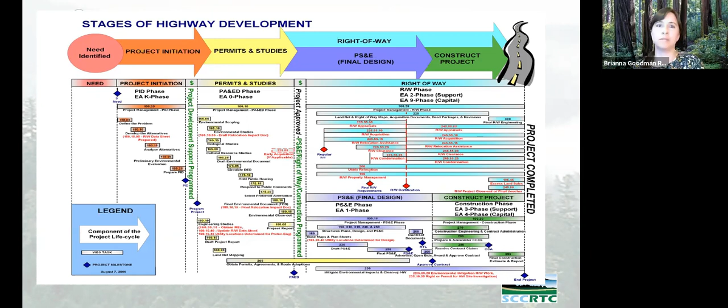All right, thanks, Brianna, appreciate that.

So tonight again, our two projects we're going to talk about, they are distinct, but they are closely related. And you're likely going to recognize some of the images from the SLV planning study, because that was the source document where many of the elements being considered in our project have come from. So this is your plan. These were your goals, your opportunities brought forward, and your community values. That's what we use as a foundational document.

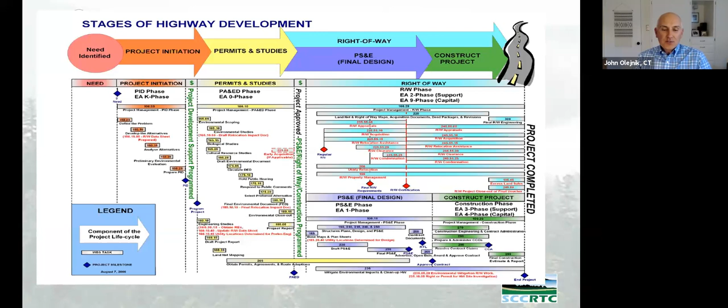So first, let's give our attention to Justin McMullin, who will briefly present to you what we call the Felton CAP-M. As you listen to the presentation, maybe look for the complete street elements that are being included in this very important pavement project.

Thank you, John. Good evening, everyone. My name is Justin McMullin, and I'm the project engineer for the Felton CAP-M project.

The Felton CAP-M is a preventative maintenance project which intends to extend the service life of the existing pavement with minor distress for a minimum of 5 years. The additional assets part of this project include Americans with Disabilities Act compliant curb ramps, culverts, and guardrail replacement. The project would bring the facilities up to good condition and meet current crash standards.

Within the project limits, the San Lorenzo Valley Plan was used to identify complete street opportunities within the town of Felton. Our project limits on SR9 start at Highway 1 and end 150 feet south of El Solyo Heights Drive, post mile 0.046 to post mile 7.5.

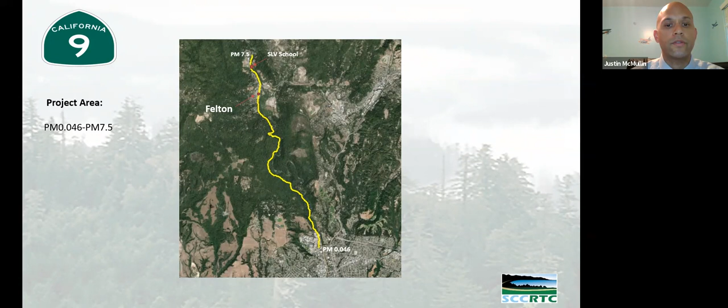The complete street elements to be addressed would begin at Laurel Drive to Kirby with new sidewalk. When taking a look at our layout, you may see resemblance to the SLV plans. We show sidewalks and bike lanes on both sides of Highway 9. In addition, we have restriped a 12-foot two-way left turn lane.

The plan also depicts a proposed crosswalk pending analysis in red, which is not part of the scope and will need to be analyzed in the next phase of the project.

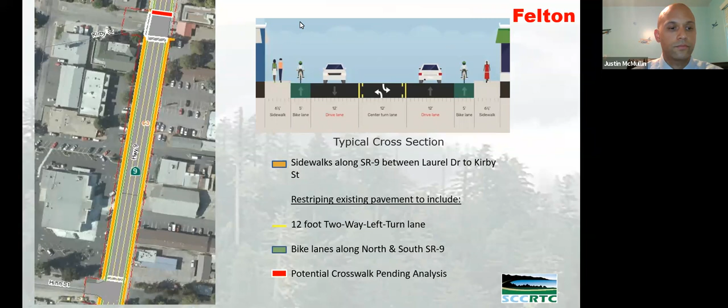At Graham Hill Road and Highway 9, we have included a right turn channelization. Currently, the right turn lane is free right. By not allowing it to be a free right, we create better pedestrian access. Realigning the right turn lane will allow storage for right turns while also allowing guidance for bicyclists with the separation of the through movements. Additional improvements include reconstructed sidewalk, island, ADA curb ramps, and enhanced crosswalks.

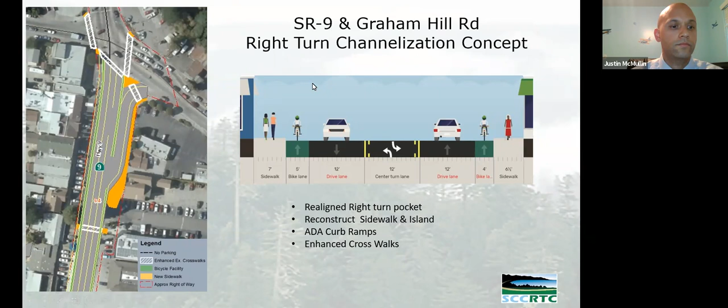With the help from SCC-RTC, we have identified areas within Felton that could benefit from improved sidewalk, crosswalks, and right turn channelization. We have utilized some of the typical cross sections provided in the San Lorenzo Valley Complete Streets Corridor Study and have modified them accordingly.

With the SLV plan in mind, we analyzed their feasibility. The pedestrian concepts were mapped using GIS to get an idea of existing utilities, right-of-way, environmental, and physical restrictions that might occur. We provide environmental mapping to have the area studied for project approval and environmental documents.

By obtaining environmental clearance, the project has the ability to incorporate additional funding from other sources for future construction of complete street elements, giving our local partners opportunities to apply for special funding.

Additional areas scoped for environmental clearance include multi-use path south of Laurel to Redwood, sidewalk at the entrance of Henry Cowell State Park, and a continuation of the multi-use path from Redwood to Lakeview Drive with the addition of viaducts to widen the roadway.

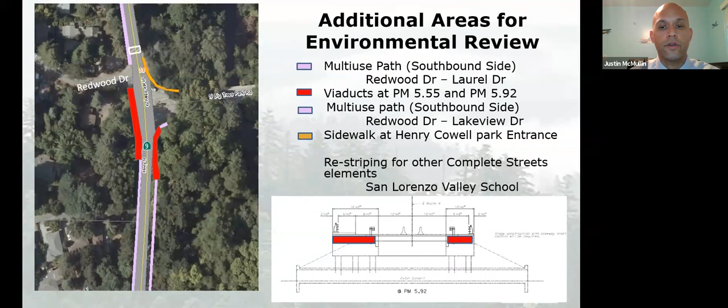Any restriping for complete streets elements at the school access will be reviewed during the next phase of the project. The impacts of the project's assets required a higher level of environmental document, streamlining the environmental clearance of the complete streets elements identified in the SLV plan.

A brief overview of what we discussed tonight.

Redesign right turn channelization at Highway 9 and Graham Hill. Placing sidewalk along SR9 from Laurel to Kirby.

Drafting the environmental clearance areas and studies for future potential projects. These studies would include the multi-use path, viaducts, sidewalk at Henry Cowell entrance, and restriping in front of the school.

The project is set to complete PA&ED in 2025, with construction in the summer of 2027.

And with that, I'll let Joseph finish with the complete streets PID locations.

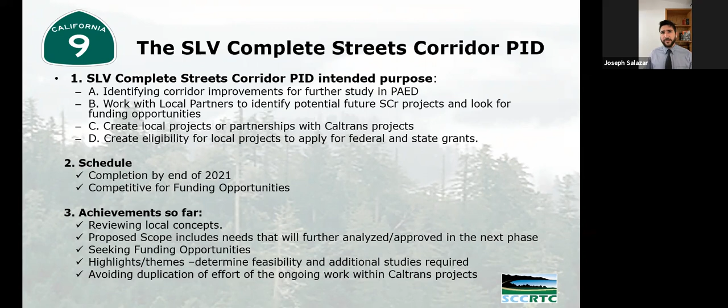The locations we'll cover in this presentation are from Glen Arbor to Felton, Ben Lomond, Irwin Way, and North and South Boulder Creek. This project continues from the Felton Cap M that Justin had just covered, and it has a minor overlap at the school as covered in Justin's slides.

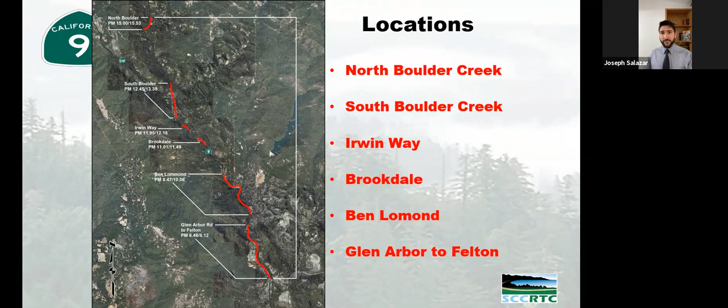Heading north from the school, we've scoped out bike lanes on both the north and southbound sides of the road where feasible, and a sidewalk on the southbound side to be reviewed in the future for feasibility.

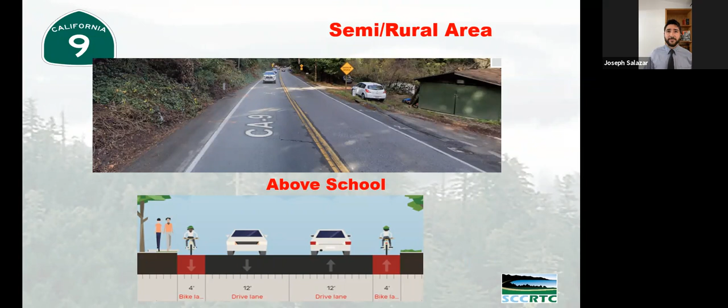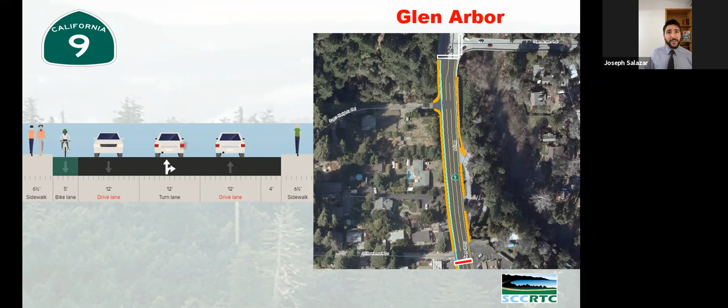These will provide connectivity up to Glen Arbor, where the southbound bike lane continues, and we have also mapped out sidewalk on both sides of the road as shown here, along with crossing improvements down at Willow Brook.

Up north from there, at Highlands Park, we have designed bus stops for both the north and southbound bus routes, as well as a multi-use trail along the southbound side that continues as site conditions allow northwards, as shown in this slide.

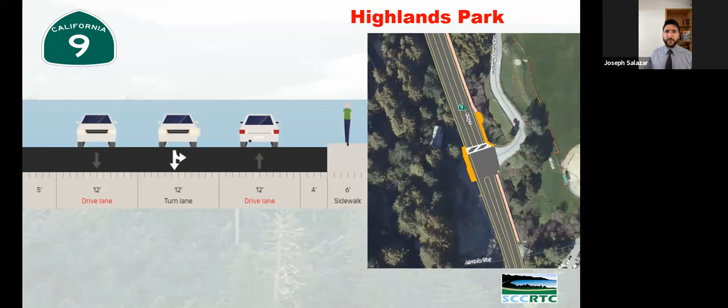This allows for connectivity up to Ben Lomond, where as the roadway widens out, we've mapped out bike facilities, improved parking at storefronts, and updated sidewalks.

A key update, as you will note on this map, is over at Love Creek Road, where we've made a clear delineation for vehicle access to Highway 9, as well as including sidewalk or crosswalks for the San Lorenzo community.

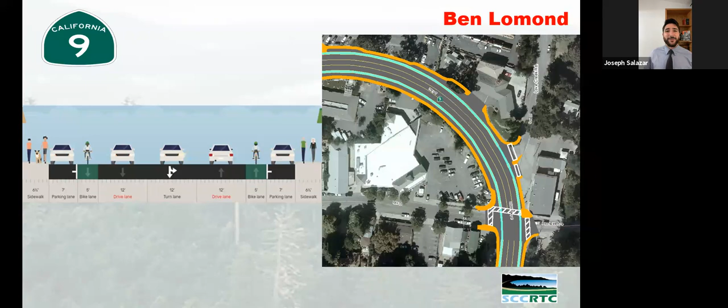Moving northwards up from there, past Mill Street, you'll see the sidewalk continuing up, going through a section of frequently impacted vegetation, which has been scoped for removal.

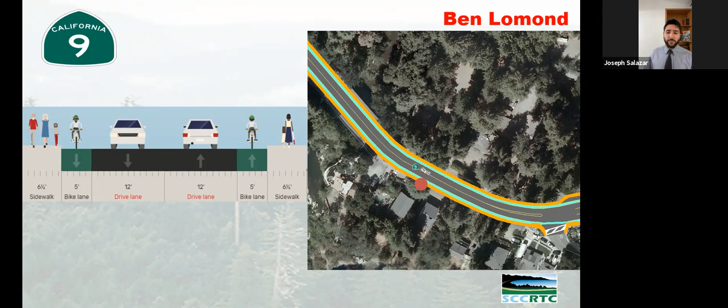Further north, as we go near Alba Street, we have laid out delineations for better ease of driver access, as well as adding a north and southbound bike lane, while maintaining the northbound side sidewalk as shown in orange.

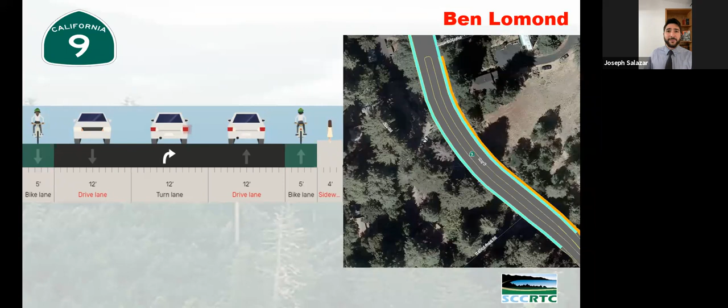In Brookdale, due to site conditions and roadway width limitations, Brianna has been great in coordinating with the owner of the Brookdale Lodge on the possibility of including sidewalk within his parking lot area to be reviewed in the future. This would allow for safe pedestrian access northwards and would also limit the need for tree removal.

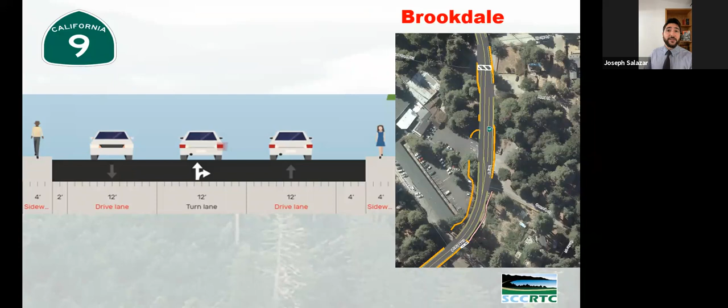Similarly, on the southbound side, we've included a multi-use path segment just opposite from the inn, which would also minimize vegetation impact. And this brings us to the rural section, which is south of South Boulder Creek.

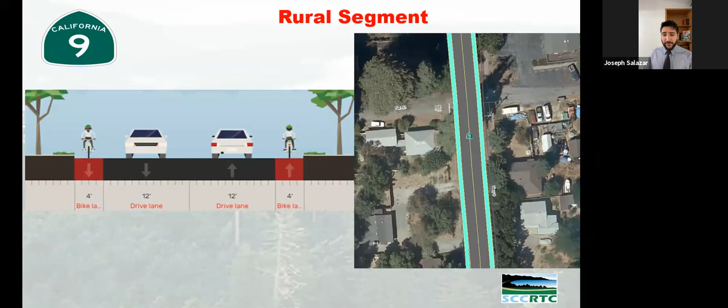We have added in north and southbound bike access, which continues into South Boulder proper, where as the roadway widens out, we've added, similar to Ben Lomond, updated parking and sidewalks, as well as curb ramp extensions to facilitate pedestrian crossings at intersections.

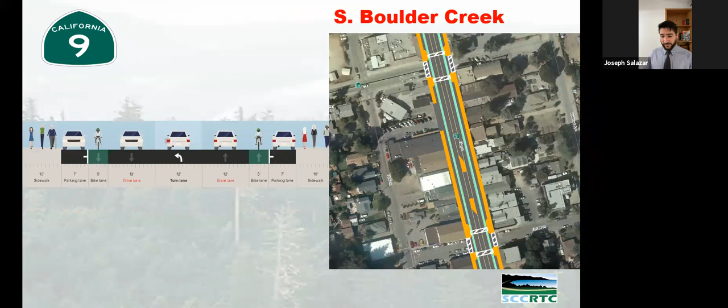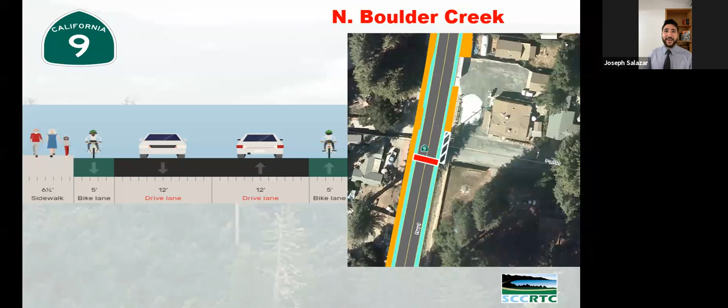Finally, at the far north end of Boulder Creek, near the Mountain Store, we have added bike lanes on the north and southbound side, as well as crossing improvements on the northbound side. Our goals moving forward from here are to deliver the project initiation document by 2021.

From there, SCC RTC would branch off projects from this document and pursue funding. Back to you, John.

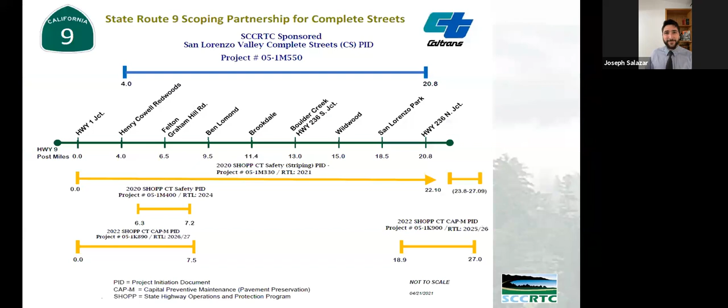We're bringing this slide up now to show you. It's probably something you recall. We've shown it at several of our public meetings, and we've shown it at several of our RTC board meetings as well. What this really demonstrates is a picture of the partnership that we have, and it's an example of the many different projects that are going concurrently right now along Highway 9, along the San Lorenzo Valley corridor.

The blue line up top there, the Complete Streets PID, the one that Joseph just talked about, this is a game changer. This is really the first of its kind because it's allowed us to take the recommendations from a planning study like the San Lorenzo Valley Complete Streets Plan.

It's allowed us to have the opportunity to take those concepts and vet them more fully. Some examples of what was looked at was in Joseph's presentation this evening. You'll also notice that while there appears to be overlap, there's not redundancy because the overlap is intentional. It allows us to see what elements might fit in which projects at the appropriate time. So that's a high level look at the two projects as well as the overall corridor and the things going on.